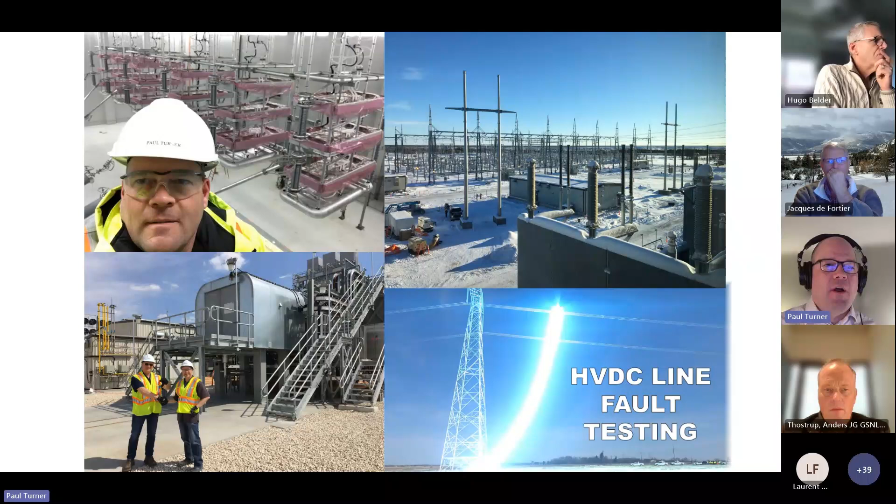So why is commissioning important? Too often commissioning is just thought of as testing at the end of the project, right? I'm sure you've heard that, or maybe you've seen people that have had that thought process before is we'll just test everything at the end. And in this presentation, I'm going to show you how commissioning is really the digital thread that connects all the data that we have.

This data-rich 3D model environment, and how that's connected with our asset management systems needed once projects are completed for ongoing operation and maintenance of our facilities. Commissioning is really a vital project management process that ensures that we're delivering highly reliable systems at the end of projects that meet reliability and meet performance requirements and meet the original intended design intent of the projects. And without proper commissioning processes, there's always costly system failures or unplanned outages that affect projects through normal operations.

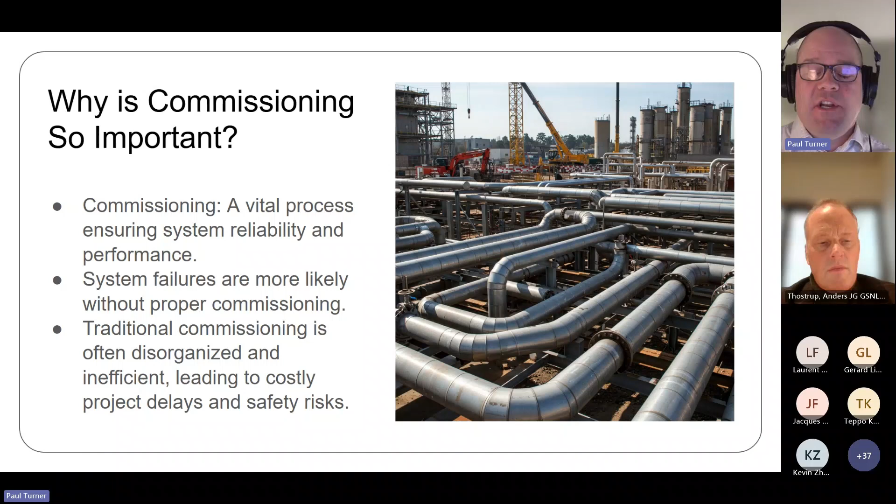And traditional commissioning methods have often just been lacking to take advantage of this data-rich environment that we have from some of the engineering tools we're using for 3D modeling and leveraging this data on projects through commissioning. Because there's lots of pieces of the puzzle that make up, when it comes to commissioning, that make up projects, and this all must fit together at the end.

And the real reason projects are often delayed is because right from the start there was no understanding of how all the commissioning puzzle pieces were going to fit together at the end, and there was no digital alignment or process to make sure that everything functions correctly in the end. Projects always have a lot of moving parts, and a proactive approach to commissioning is required to make sure all the pieces come together and fit together properly in the end.

And without a proactive approach to commissioning, projects are late 9 times out of 10. And this is the real reason that a lot of projects are late.

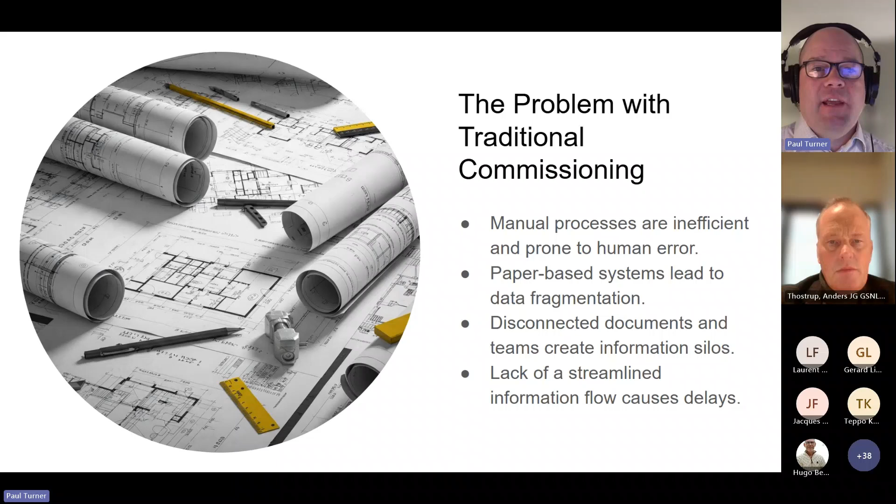The problem with traditional commissioning is projects often result in scattered data that makes tracking of all the moving pieces very difficult. Many teams still rely on inefficient data processes, increasing the risk of lost information or inefficiencies, or are still maybe even using paper processes and Excel processes, and that just doesn't cut it for complex projects anymore. A lack of streamlined data makes it very difficult to manage information on a daily basis.

The fundamental problem is that a lot of organizations only focus on what they can see, right? You can see people in the field doing the on-site testing and physical interaction with the equipment as the tests are taking place. And they think that testing is the bulk of the effort for commissioning, but testing is just the tip of the iceberg. On-site testing is only 20% of the commissioning process.

And with all the risk mitigating activities that need to be done to have successful testing later, that's hidden below the surface that a lot of organizations don't necessarily see. And that part of the commissioning process often gets forgotten about. When organizations only focus on on-site testing, they're missing 80% of the activities for a robust commissioning process. This is the 80% of risk mitigating activities for commissioning that ensure that your on-site testing at the end of the project actually goes smoothly.

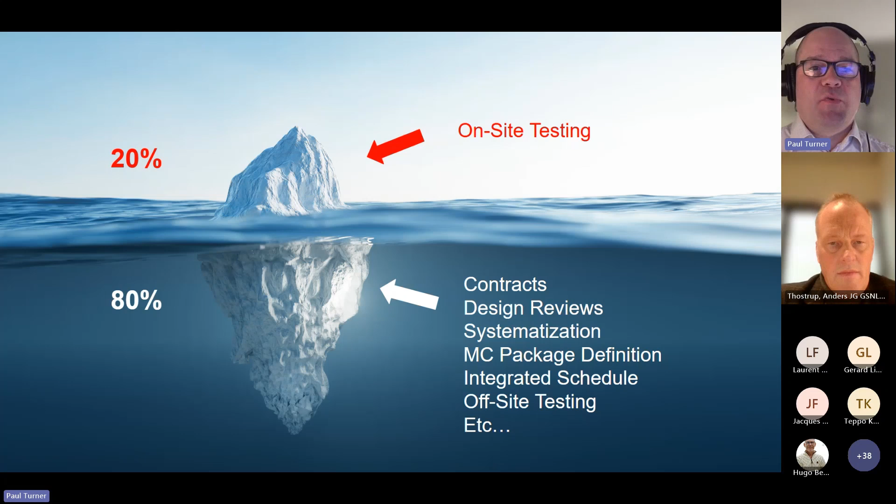These 80% of activities, these are the steps of the commissioning process that are hidden below the surface if we're using this iceberg analogy. And these are what makes sure your on-site testings are actually successful. And if you're only focusing on the tip of the iceberg and focusing only on testing, then you're adding a lot of unnecessary risks to your projects. This outdated construction-led approach to projects is what leads to 9 out of 10 projects being late and over budget.

A better approach is to take advantage of the data-rich environment that exists on projects and use this data to our advantage to manage commissioning and manage the ends of our projects. There are vast amounts of data on projects that is being unused, and not being gathered to make quality decisions on projects, because the quality of your data directly impacts the quality of the decisions that you can make on projects.

3D modeling facilitates the bridge between this data-rich engineering environment and operations by implementing a robust commissioning process to connect those two critical aspects of projects. And these data-rich 3D model environments must be leveraged for improved project commissioning to ensure data consistency and eliminate gaps between design and implementation.

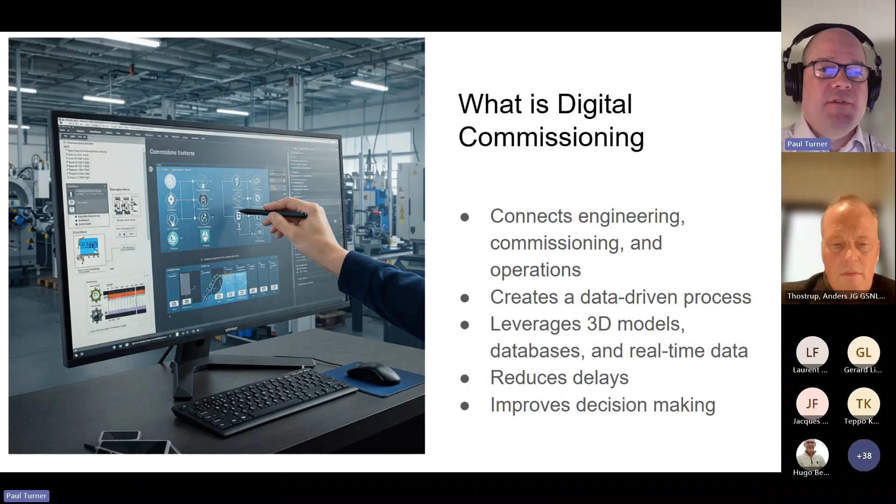3D modeling has evolved significantly over the years. It was initially used for design validation and clash detection in the 90s, and it's now an essential tool for commissioning, ensuring that no elements are overlooked. The project definition and data generated from 3D models during our engineering and detailed design phases is essential to defining a structured commissioning process as well, to define the systems-based approach for construction completions and on-site commissioning workflows, and to define the methodical approach in how projects meet cost and schedule objectives.

Not only are 3D models created in BIM 360 type of environments for engineering design activities, but these data-rich environments are used to define our construction completions and our commissioning workflows for a smooth transition from construction to commissioning, integrating the beginning of projects to the end of the project for a complete digital thread through all phases of the project.

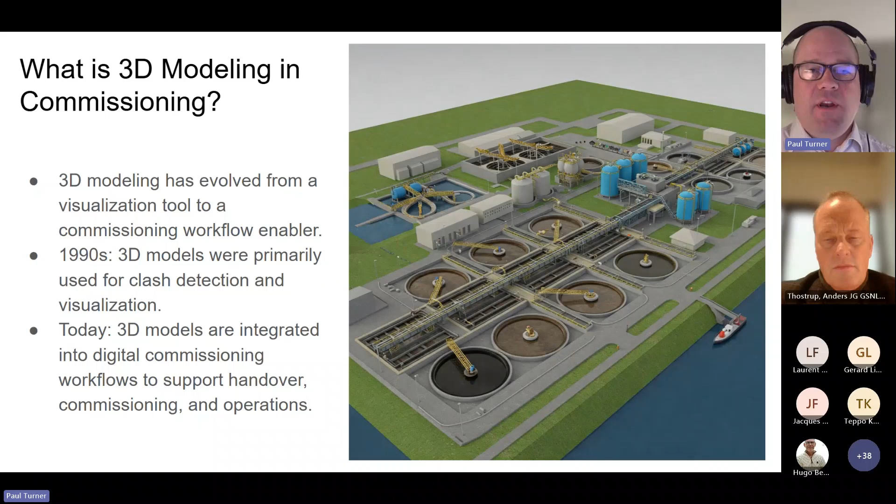So traditionally on projects, construction groups focus on area-based construction, and rightly so, to optimize long lead deliverables and coordinate large workforces and optimize installations by area. At about 60% or 70% through construction, installations must transition to systems-based completions. And this is where the power of 3D modeling is used to ensure a smooth transition from construction to commissioning.

And with a robust definition in 3D models of each system handover, nothing gets missed, and all project groups are aware of responsibilities to complete each work and complete each milestone of our gated commissioning workflows. A structured systematization approach in 3D models ensures a smooth handover process, reducing risks and improving project efficiency. And as I'm sure you're aware, the last 10% of any task to get to completion is always the hardest, right?

How many times have you seen someone start a task, but it's difficult to get to completion, right? That last 5% or 10% is always the hardest part of every task. It happens to all of us, and construction and commissioning is no different.

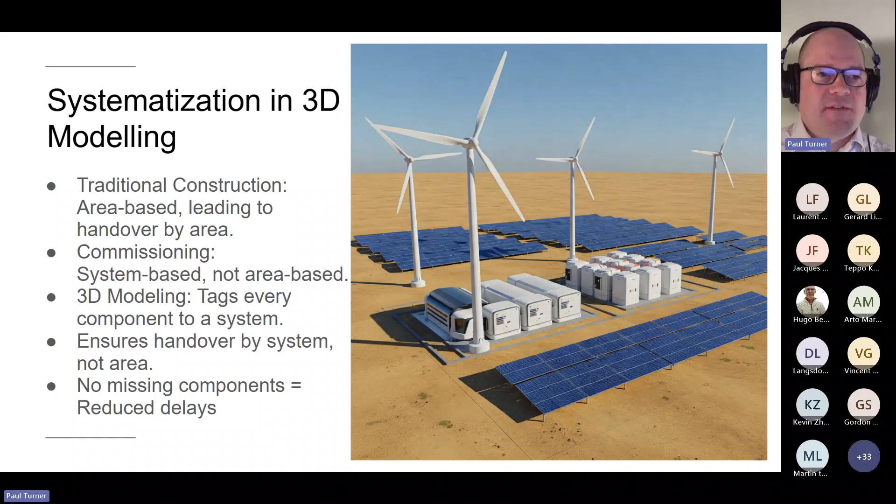from every big piece of the project down to every little setting in a VFD. Everything's defined so that nothing gets missed. And with that approach, then expensive delays are avoided by avoiding surprises when things are missing.

When we have this data-rich 3D model environment, what data is actually being managed? It's more than just a pretty 3D representation of your project. I'm sure you've seen the wireframe models, but this is a lot more than that. I'm sure you've heard of the term digital twin, and when used properly, a complete digital representation of your project is created in software to essentially simulate your project environment.

And this opens up a whole bunch of possibilities when a high fidelity digital twin of your project is created with all the associated data to fully define project functionality and operability. 3D modeling software manages more than just documents. Everybody's got a document management system on their projects where all the PDF files are uploaded. We're talking about more than just document data.

This is actual project data and the specific details and functionality of each of the project components and system definitions. It creates a comprehensive digital representation of all project systems, a digital representation of your project that actually functions, not just an image of your project, like the 3D wireframes that you've maybe seen.

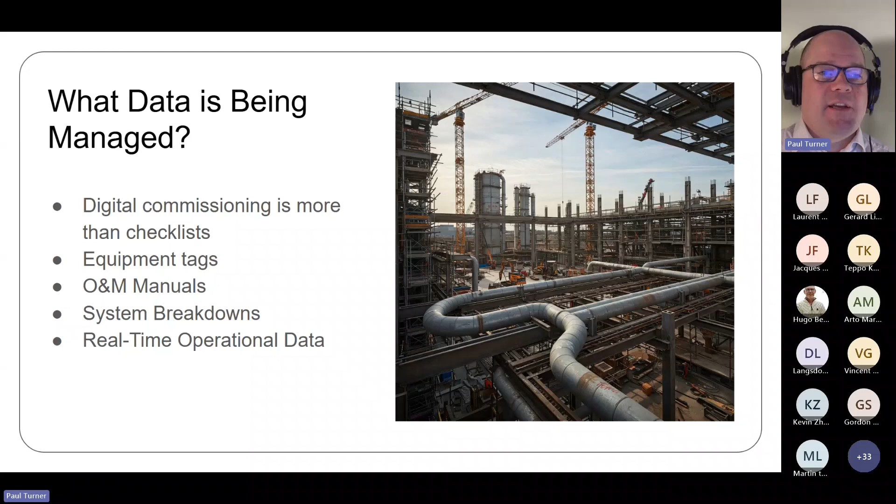A lot of projects we look at, a lot of the phases of projects end up being very siloed. The engineering team designs, they create design packages and they toss them over the wall to the construction folks, and then the construction folks do their good work installing their equipment, and then they pass the pieces to commissioning folks to have to integrate everything together. But this is hardly an efficient approach to projects by having each group complete tasks in isolation.

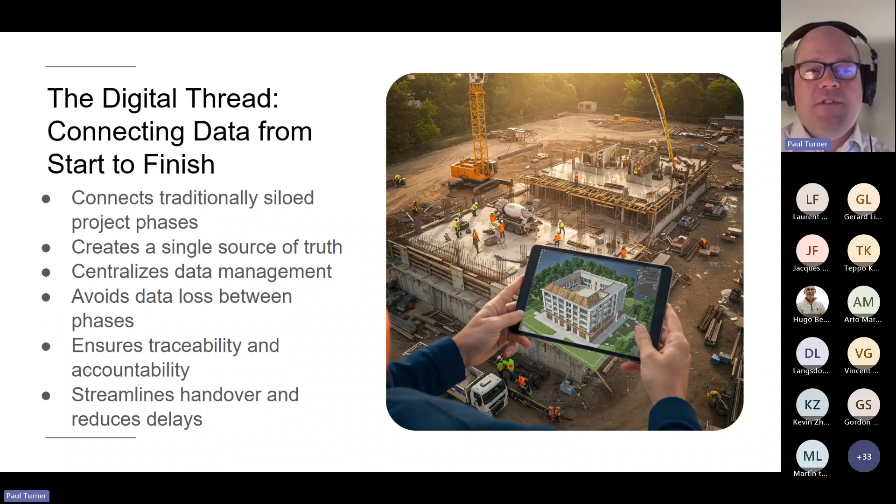A better approach is to start with fully developed 3D models and ensure the digital thread keeps data connected across the entire project lifecycle, ensuring accountability, traceability, and efficiency through all stages of the project. And your 3D model becomes your single source of truth to define the data needed through all stages of projects. With a robust data set, nothing gets lost through system handovers, ensuring traceability and accountability at every stage.

So there are some groups that are really pushing the boundaries and developing highly advanced technologies with digital twins, and they're using them as essentially a virtual environment to test system performance before a single installation takes place in the field. The term is sometimes referred to as virtual commissioning, and this allows teams to test and verify system functionality before field deployment, reducing any of the challenges with integration or unexpected issues that come later during on-site testing.

And this reduces risks and saves time because commissioning at the end of your project is the critical path to get to your in-service date. Any disruption to that critical path is very expensive, and we want to avoid that.

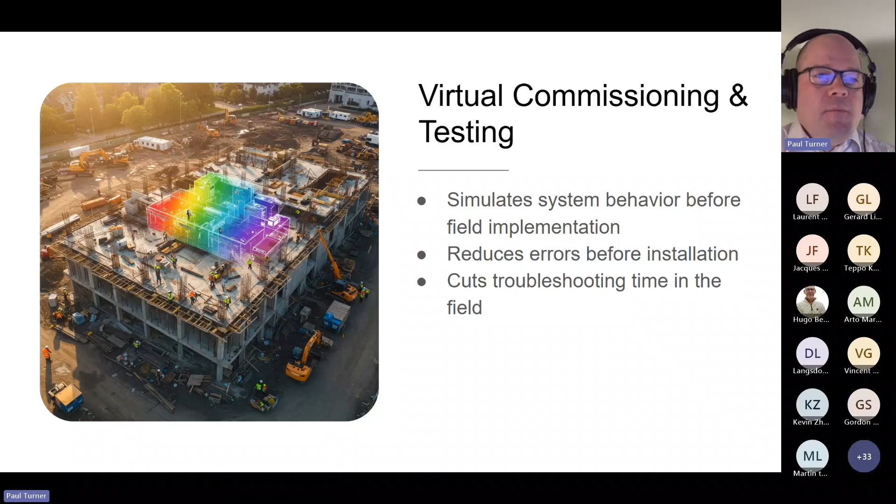By taking this approach and verifying system functionality in advance, we can prove the systems function and that their system readiness and pre-startup conditions are in fact what we need for startup, and that's going to make our startup go much smoother. On a project where we simulated the control systems, it was an HVDC project, and we simulated all the control systems in a very high fidelity environment with digital simulators.

When we got to on-site commissioning, we were essentially only looking for wiring errors in the field because we had already proven that the 60 control and protection cubicles to manage this system, that everything functioned as intended and functioned as it needed to before we even delivered those cubicles to site.

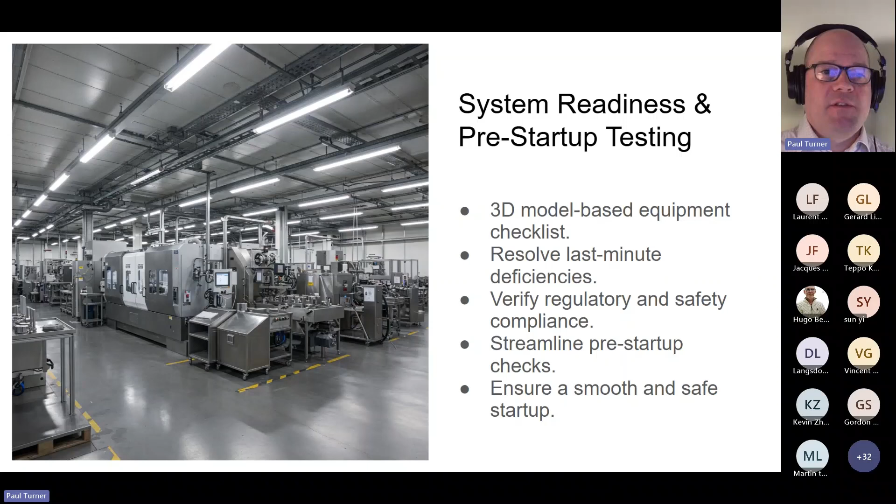So when the cubicles were wired on site, there were a few minor wiring errors, but we knew that that system worked. And startup, in fact, took place flawlessly and effortlessly because we knew everything had already been proven in advance in a digital environment. So we had a smooth and safe startup on site because we had already started the system several times 18 months prior and knew that it was going to function.

3D models create this great training opportunity as well, where we can use these systems to train our plant operators, have them familiar with these complex systems so that they're ready for startup and handover of the systems at the end of the projects. And for complex systems, this is paramount that operators are familiar with safe and efficient operation of the facilities, especially when we're working on infrastructure that society is dependent on.

We can't be starting up these systems and having unplanned outages. They need to work with a high degree of reliability, and we can prepare operators for that environment using 3D models, digital simulators, and the systems used for verification of control systems.

So we provided a digital environment of the plant HMI to operators 6 months in advance and had each operator perform all of the system SOPs in a simulated environment where there was zero risk that they could do any damage as they're learning or understanding the systems, and become very familiar with plant operations ready for startup.

And when it came time for startup, each operator had already started up the system several times on the simulator. So they were very familiar with the startup sequences, including all the contingencies that needed to be considered for any of the plant failure modes, if something were to go wrong during startup. So training in 3D environments helps our plant operators familiarize themselves with the systems, which improved performance and saved time during on-site activities, as well as reduced operational risks as the facilities were placed into service.

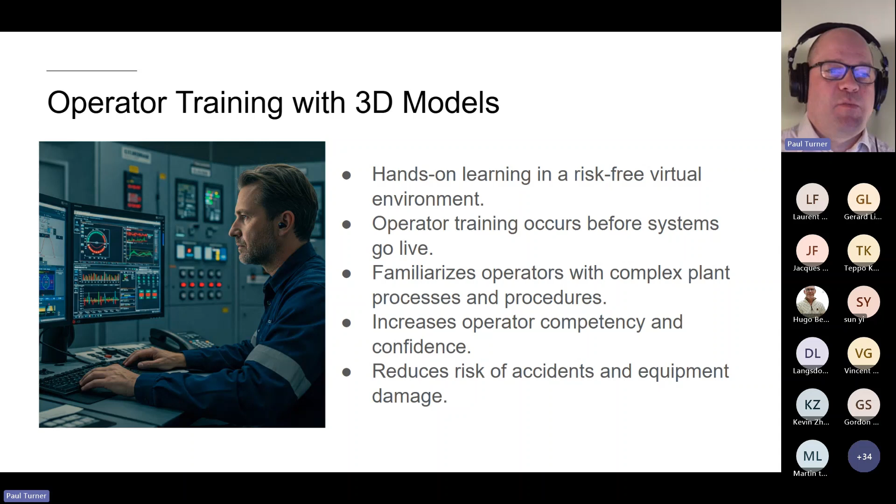With a centralized digital model, teams can collaborate much more efficiently because data is easier to get access to. Often on today's projects, it's challenging just to get the right document and get the right information. And when there are those barriers in information flow, that slows the project down quite a bit.

But when you have these digital systems with all the information in one location, then this reduces misunderstandings and helps all project groups understand the complexities of commissioning. And anything we can do to foster easier access to information and easier communication on projects will always contribute to smoother project execution.

So some additional benefits of 3D modeling on projects and some of these high quality data environments that we use for a robust commissioning process are improved traceability. If there's a supplier that has an issue with a piece of equipment, then it's easy to trace exactly where that item is installed. And this was very important in my aerospace days. If there was even just the tiniest little screw that had an issue, we knew exactly where that item was installed everywhere on a rocket or spacecraft system. And the same issues can happen on large projects spread out over a large area.

If there's a potential issue with a piece of equipment, no matter how big or small that is, we need to know on the project where those items are installed so we can address potential issues. Improved efficiency, with easier access to information, where instead of looking for information, the information is pushed to each person. So you no longer have to go looking for what you need. The information is pushed to you, it's at your fingertips and easy to access and no longer difficult to find. And improved risk reduction.

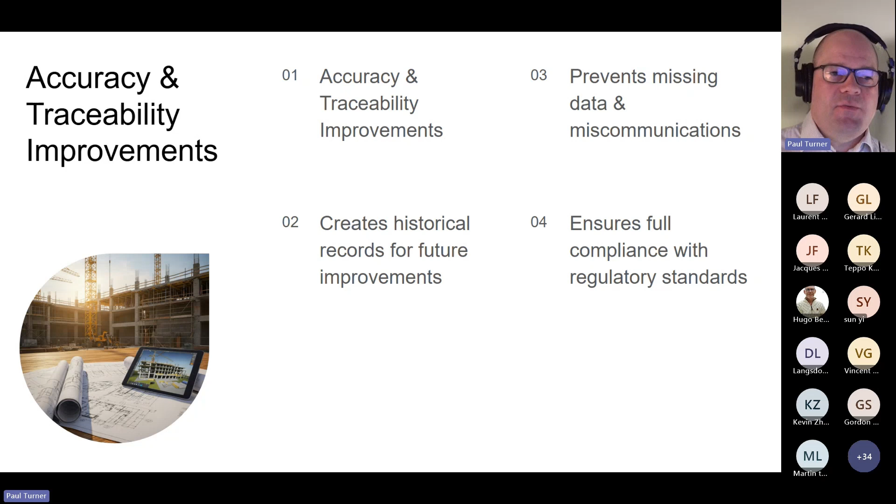This is probably the biggest benefit, where risks are identified and mitigated much earlier, ensuring a streamlined commissioning process to avoid expensive delays. And this was my biggest issue that I saw from aerospace to ground-based projects: I wouldn't say there was a desire, but it always was easy to kick the can down the road and push issues later in projects. But by taking a proactive approach in our 3D models much earlier in projects, we can prove out some of these systems and reduce risks on projects so that they don't become expensive delays later.

As systems become more powerful, I think we're only starting to see the capability of AI to manage data on projects. As AI is incorporated more into the commissioning and our project workflows, these systems have the ability to analyze huge data sets and give us insights into predictive analytics that we've just never had access to before. And large projects are, I think, really a best use case for AI to analyze these huge data volumes, large data sets, and give us more insight than we've had available to us on past projects.

As we're gathering this information on projects, the data sets become quite large. It's more than just the PDF documents on your project. This is the actual data that's recorded and managed on a project, as in how long is it taking to do particular loop checks, what are the bottlenecks, what are the workflow efficiencies, and getting these insights that we've never had before to manage some of this data in real time and make real-time decisions.

Because as you know, the cost of delays increases as projects progress, right? While the cost of commissioning is typically estimated at about 5%, plus or minus a little bit, of the overall project budget, when it comes to the critical path of commissioning at the end of projects, the cost of delays during commissioning can become astronomical, in the millions of dollars per day. I've worked on projects that have a $5 or $6 million daily burn rate.

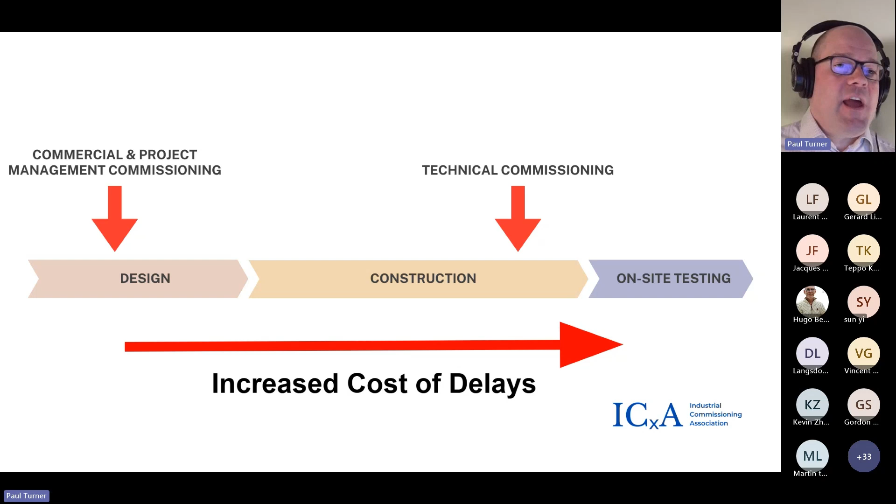And when you're faced with those kind of numbers, every day of commissioning is valuable, and we need to be doing anything that we can earlier in the projects to protect against any delays during commissioning. So it's typically money well invested early in projects to avoid these costly mistakes later. And that upfront investment in commissioning and implementation of mature 3D modeling processes, following the best practices that we've outlined in the ICxA Global Commissioning Standard, is an excellent investment and ROI to protect projects from ending badly.

Robust commissioning processes, as defined in the ICxA Global Commissioning Standard, are essentially your digital thread to connect data-rich 3D modeling environments at the beginning of projects to your asset management systems needed for operation and maintenance at the end of projects. This digital thread is imperative on today's projects, since operation of industrial facilities is a complex process in itself.

And when it comes to regulatory compliance or operational efficiency, or just daily routine maintenance to troubleshoot and fix systems to maintain performance, too often on projects we see this data-rich 3D modeling environment, but then it falls apart with a lack of robust commissioning processes, yet there's still the expectation to come out at the end of the project with all the data-rich end products from the project needed for operations. And without that robust commissioning process in between those two processes on projects, things kind of fall apart.

When commissioning processes are digitalized per the ICxA Global Commissioning Standard, the digital thread is maintained through all phases of projects for a continued data-rich environment in operational phases, so that nothing gets lost and automation is put to good use to prevent human error and improve data integrity.

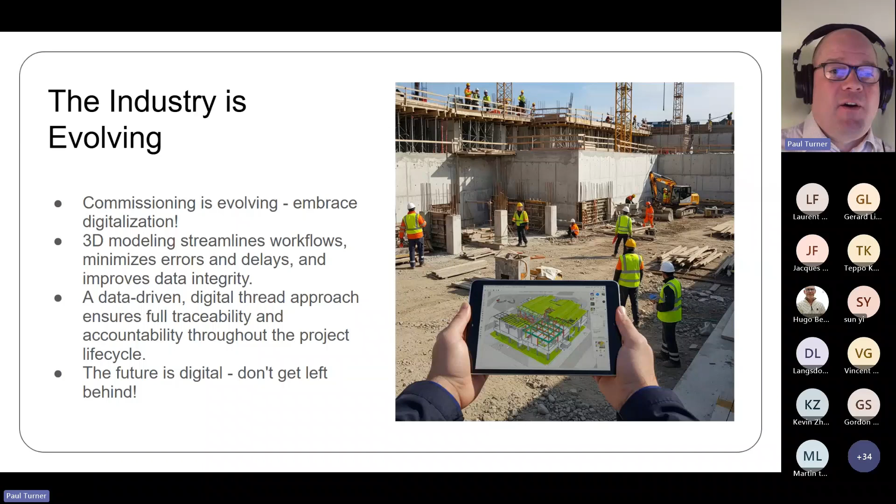So while some project teams have been able to avoid the digital transformation for the last couple of decades and continue with manual work processes, there is more of a necessity for digital transformation than ever before, given the increased pace of technological change on projects. And personally, I can't envision a company in 5 years from now that is still using manual methods to manage data on projects. They just won't exist, since the more progressive companies will drive the others out of business as we harness the AI data revolution that is upon us.

So if there is one thing you take out of this presentation, it is that commissioning is a data-driven process and is the digital thread connecting all phases of projects. And if you're still of the mindset that commissioning is just testing at the end, then you're missing a significant opportunity to completely revolutionize your project delivery for improved cost and schedule performance.

And the companies that embrace the use of data on projects will be the leaders in the industry in 5 years from now. Begin your projects with robust 3D models in a data-rich environment and leverage the data through all stages of projects to complete your digital thread. Leverage AI and predictive analytics for future efficiency and embrace digitalization to stay competitive.

So I want to share a case study with you that embraced the digital environment with a full fidelity simulation of complex HVDC stability controls in a 3D environment. It was very interesting because these two HVDC projects were taking place at the same time here in Canada. The first one was the Bipole 3 power project in central Canada. I was the commissioning manager on this project, and we implemented a full fidelity simulated environment of the project control systems 2 years prior to the in-service date.

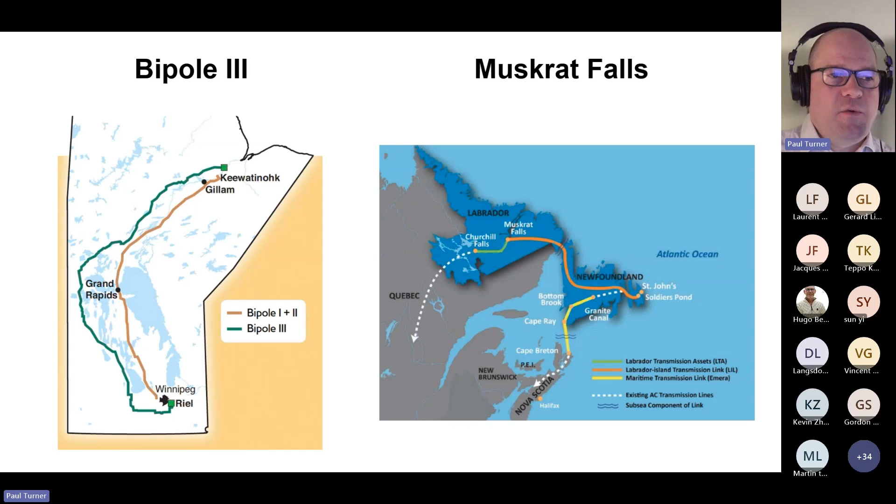So we've covered a lot of good information in this presentation, but what's next? How do you actually make use of 3D modeling and the data generated from such high fidelity systems? If you implemented the systems and processes we've discussed today, do you think you would be able to make better decisions on projects, having access to better models, better information, better data? Do you think you'd be able to leverage this data to reduce risk and improve the quality of projects? And do you think you'd be able to deliver projects more efficiently with access to these tools and data to meet cost and schedule objectives on your projects?

There are actually over 25 different commissioning software systems on the market that leverage the data from 3D modeling systems to connect the digital thread on projects through all stages. None of these software systems are ours - we don't make software, but we do use the good systems here on our projects to manage commissioning.